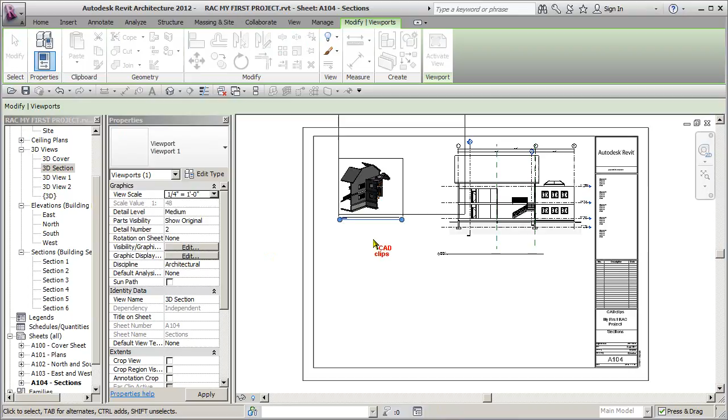And it looks like our 3D section here is a little bit too small. With this, I'm going to pick on here and change the scale to be a little bit bigger. So let's go to 1/4 inch. Aha, nudge that down, because it's not a perspective view. 3D views have scale. A perspective camera view does not have scale.

So we've got a section in there. Let's just have a look at our sheet over here. So we have one down there, we have one over here. Let's just see what scale these are at on here. Okay, they are 3/16 of an inch equals 1 foot.

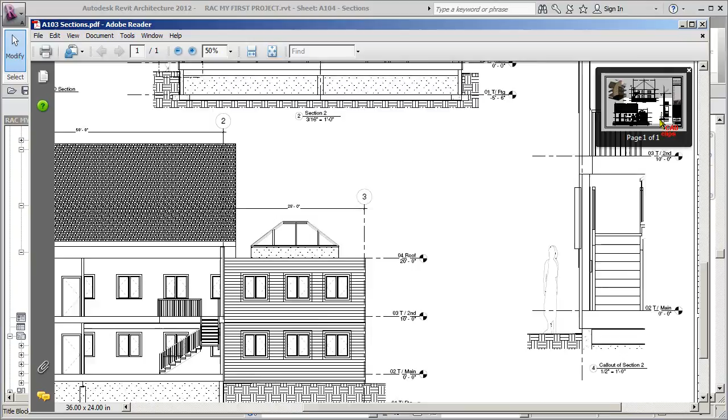This one isn't showing scale on there. And this call out is at 1/2 inch, which is at the stairway, right near the stairs and the railing. So that one can get moved down, and that one's at 3/16.

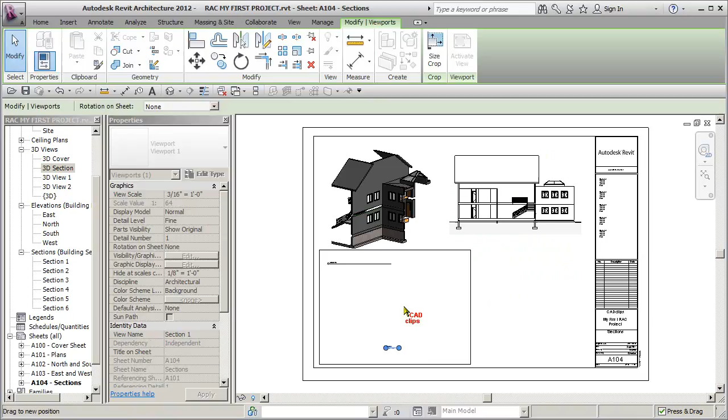Fair enough. So let's pick on here, squish this down, pick this, click out, pick over here, move this guy down here, pick this guy, nudge, nudge, nudge. This is where the nudging really comes in handy. Pick on here, click out.

Okay, this guy needs to be 3/16, which it is. Can scooch that down a little bit. Now, what's our other sections look like? Yeah, that's a good one.

Now, do we need to see all these in here? Probably not. Let's hide those categories. Clean it up a little bit, right? Same as this one.

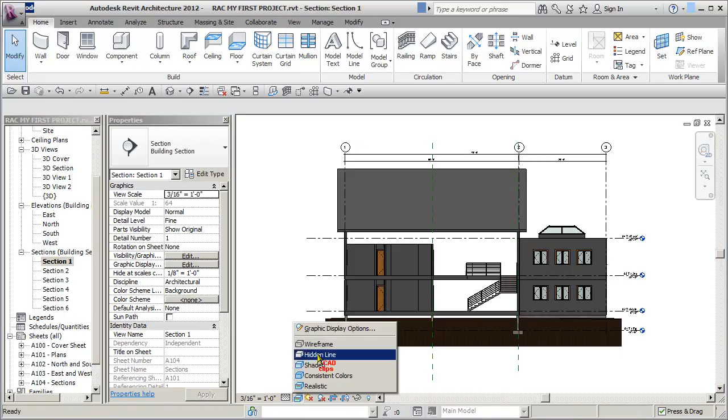Hide the category. Okay, do we want this to be shaded or anything like that? I think it looks better as hidden line. Okay, so that is section 1 and that is section 2.

What else do we have in here? Yeah, I think we'll create a new call out. These guys in here, oh, that's a good one. Actually, I prefer this section here, gives us a little more detail. Okay, section 4. So let's go back to our sheets.

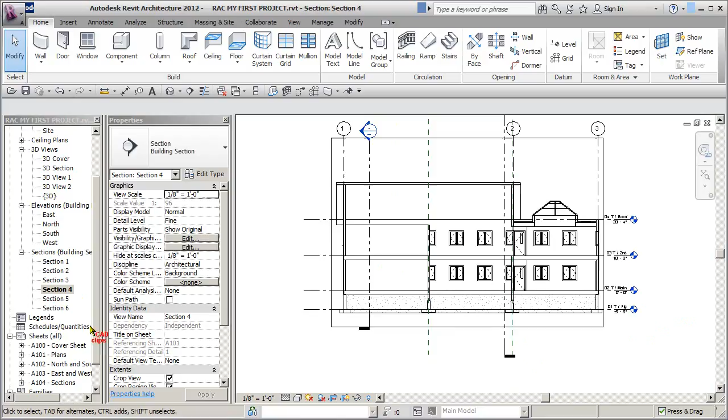And let's have a look and see if we can squeeze in another one. What do we have on here? Let's go to our full screen. If we pull that call out up, could we squeeze in another section? Let's see if we can make it fit, because I do like both of those.

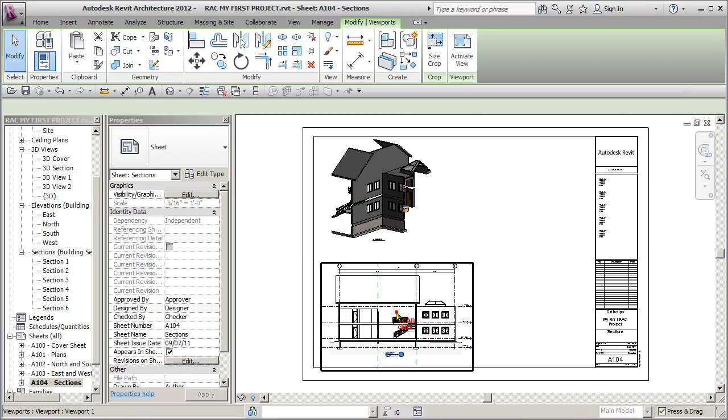Okay, let's nudge this guy way over. I'm going to activate the viewport. Zoom in here, pick on this. These are already 2D, so I'm going to pull these guys down. Click out, right click, deactivate the viewport.

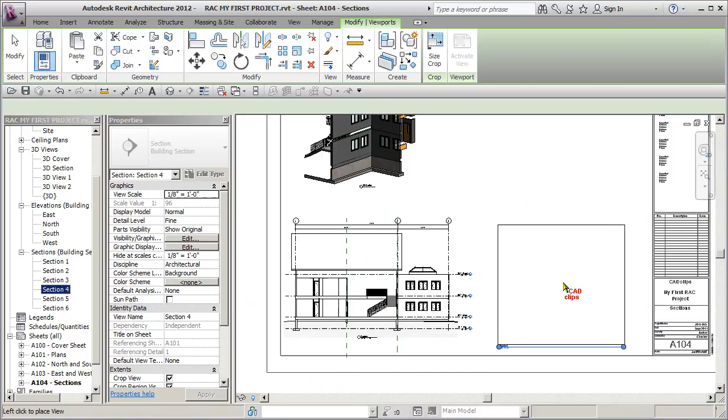Okay, now I'm going to go get that other section that I like, and as I drag it, you're also going to notice that it's going to kind of line itself up. Okay, now it's a different scale. Escape, escape, pick on here and change the scale to be 3/16.

Let's see how, move it down until you see how it lines up there. Nudge it over. Oh boy, it's going to be tight. Okay, but I tell you what, it does fit. Okay, put this guy in here.

Need some dimensions and stuff, but that's okay. Now let's go get our section 2, drag it in, place it, escape, click, change the scale, a little bigger, nudge it over, nudge, nudge, drag your title point, escape, escape, get that set up.

Not too bad. We need to add some text and annotation. We haven't really got to that. Now we're going to do a little call out.

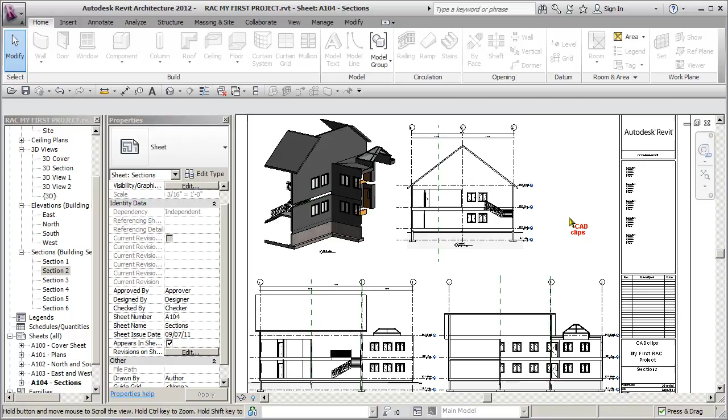And what should we do a callout of? We don't really have anything too interesting, and we ended up making another section. So let's go to our main floor. See, this makes a nice kind of detail here.

But this isn't really technically a callout, so what I'm going to do is this. I'm going to take this guy and move it to there. Okay, I'm going to take this guy. I'm not going to worry about it.

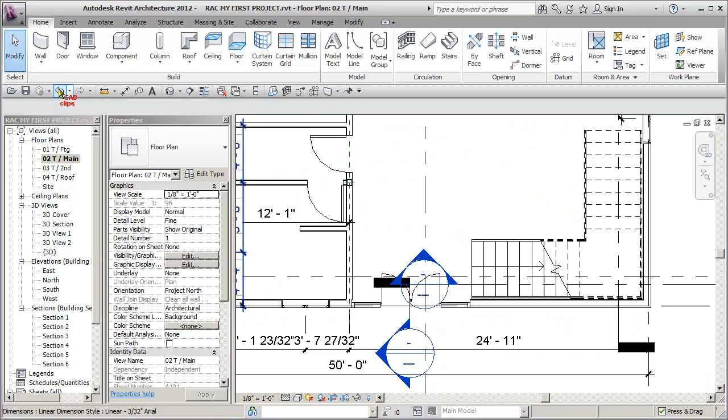Take this little guy and delete it. It's going to warn me when I delete it. Oops, didn't delete the right thing. Pick on the section line and hit delete. Yes, I want to delete the view.

Okay, now I have my main section, which is section 2, and now what I can do is create my callout over here.

So while I'm in this view, I go up to my View tab and say Callout. And I'm going to do a callout of this. Pick on here, after, drag my bubble over. Okay, the bubbles get populated once they get placed on a sheet.

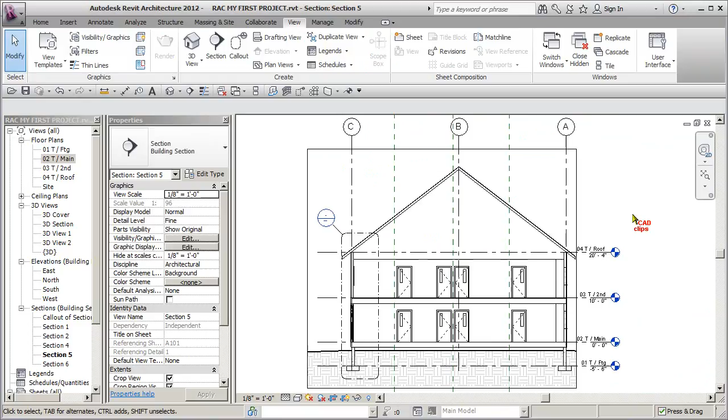Okay, now in this view here, I'm going to take these guys and hide the category. Okay, and that is actually, that's my section 5. Okay, so section 2 isn't the one I want on my sheet.

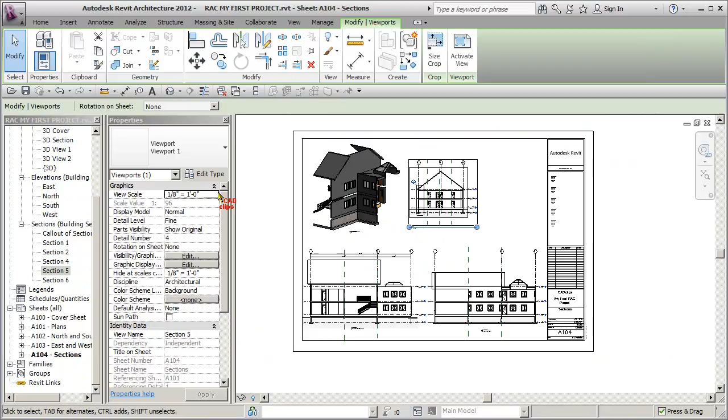All right, back to here. Let's grab this guy, delete it - that just removes it from the sheet, doesn't delete the view. Then I'm going to take this guy and bring it in, change its scale to be 3/16. Okay, and you can see now that callout is showing up on there.

Pick on here, readjust my size, escape. Okay, turn the viewport off, pick on here, go down, turn off the crop region. Nudge it over a little bit, make room for my callout.

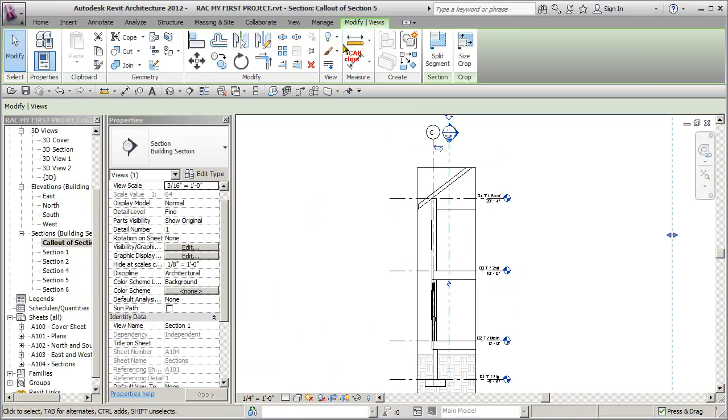Okay, now when I created that callout, what it did was create a view called callout of section 5. Click, click. If you open up that, there's your callout. Pick on here, hide the category. I don't need to see that.

Okay, in here, this is going to be 2D, so I can pull this down. Okay, I can turn off the crop region. I can turn up the detail - 1/2 inch equals 1 foot, I believe. Okay, and fine detail, I should say the scale and the detail.

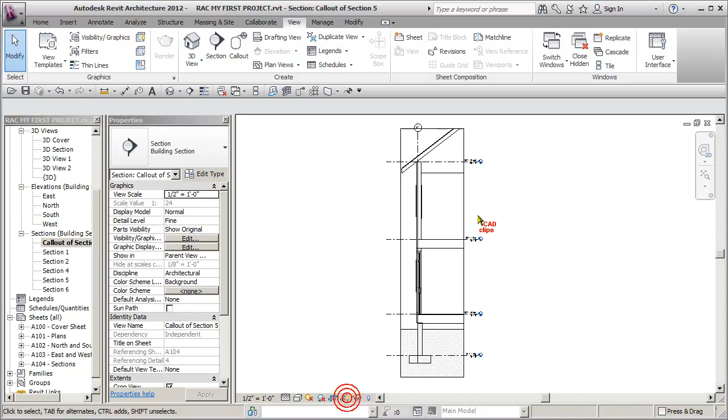I can leave that at hidden line. And now I might even turn this on. I don't need to see that much. And you'll notice there's 2 crop regions - there's an annotation crop region and a model crop region.

We'll talk about that when we get to our detailing. Pull this out because we're going to have a little roof gutter and a fascia board on there. Okay, turn this back off. That's ready to go on a sheet.

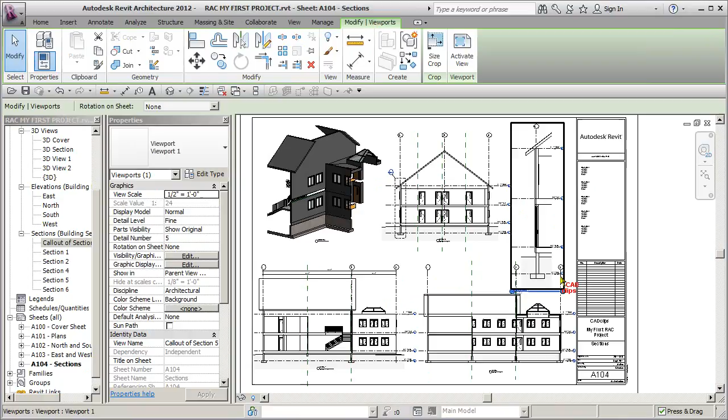Back to our sections sheet. Callout of section 5, already at the right scale. Plunk it on there. Escape, escape. Nudge, nudge, nudge. Now, this guy, maybe we don't need to see the footing.

Maybe we're going to do a separate callout of that. So let's go to here. Let's turn our crop region back on, and let's say, you know what, we're just going to go down to just the underside of the main floor on this detail.

Turn this back off, go back to my sections. There we go. Okay, now we can click on here, escape, escape, get that into place. Perfect. Okay, so there's our section sheet.

Try to say that 10 times. All set up, and I think we'll move to our cover sheet next.